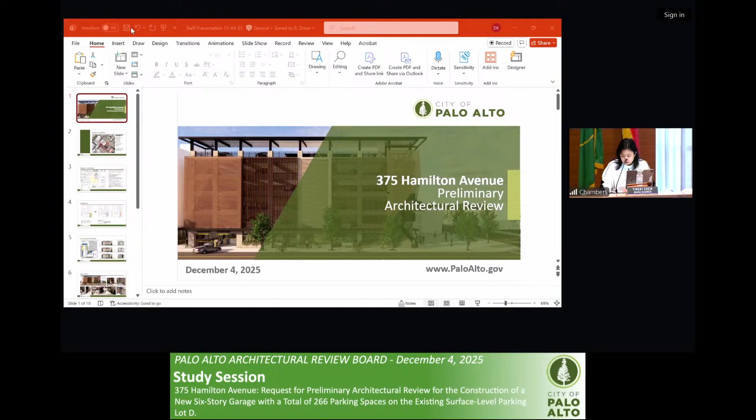With that, I will move to item number 2 today: 375 Hamilton Avenue, a request for preliminary architectural review for the construction of a new 6-story parking garage with a total of 266 parking spaces on the existing surface level parking lot D. Staff recommends that the ARB review and provide informal comments; no formal action is requested.

With that, I will hand it over to Christina for staff presentation. Thank you, and good morning everybody. I'm here today. My name is Christina Dobkevičius. I'm the associate planner with the city, presenting the city's project at 375 Hamilton Avenue, which is a parking garage project.

The project site is zoned as a public facility, and the allowable uses within the zone district include public facilities and uses owned and leased by the City of Palo Alto. Both the parking garage and the future affordable housing on the site are permitted uses.

The subject application is a request for a preliminary architectural review for a proposed 6-story parking garage that has 266 parking spaces and is currently in use as a public surface parking lot, Lot D. The downtown parking garage project was first introduced in the City Council's 2014 infrastructure plan as part of the city's broader effort to improve downtown parking availability.

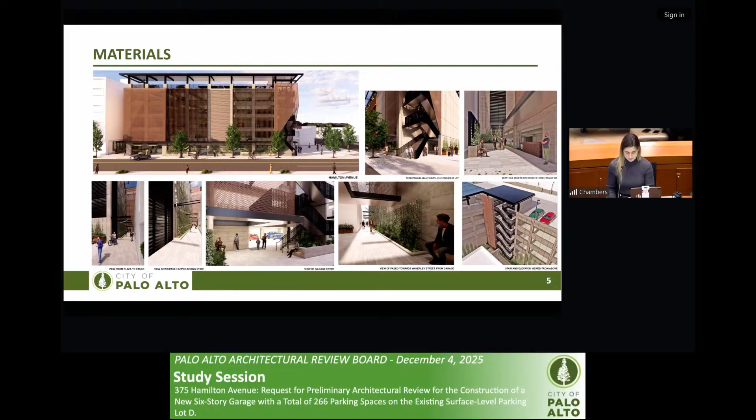Until the future housing is developed, the inclusion of a temporary public plaza east of the garage further contributes to the downtown's public spaces, which aligns with the city's vision for an accessible, vibrant, and well-designed urban environment. The proposal includes painted pavement, street furniture, and landscaping.

Today, we are asking the Architecture Review Board to provide objective and site-specific comments on the preliminary design, and your comments should be based on the bullet points here on the screen. We would appreciate comments about the massing, scale, site planning, pedestrian orientation, material selection, as such.

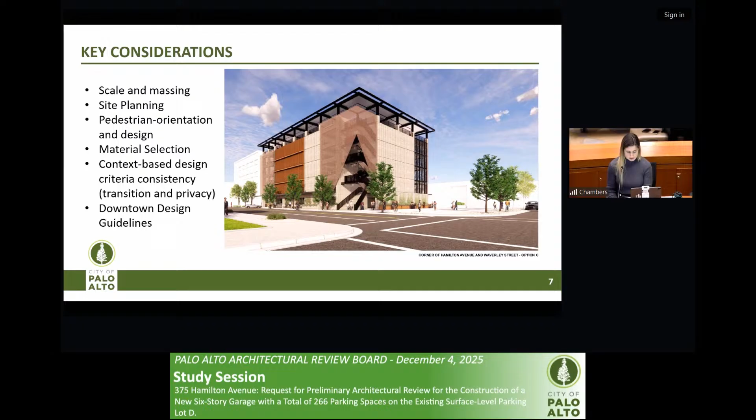At this early stage, the project has only been reviewed for general compliance with the zoning regulations, and a more comprehensive analysis will be done at the formal submittal.

Today, it's recommended that the Architecture Review Board review and provide informal comments. No formal action is required.

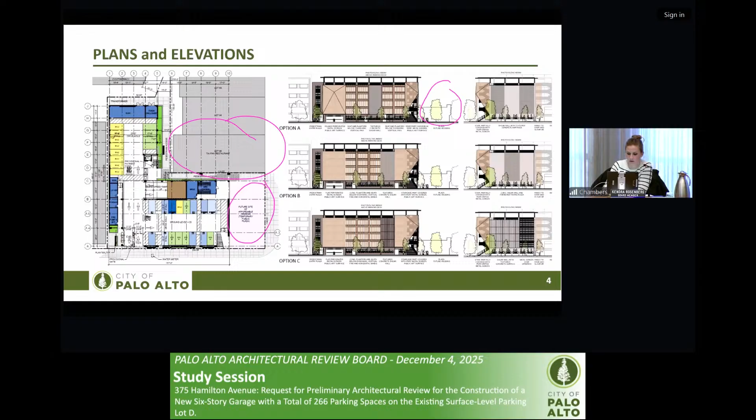Board Member Georges? Yeah, do we have any information about how likely it is and when this affordable housing might be constructed?

So we don't have any information to date. It's just that when we went to council in April, council voted for the option to reserve the space for affordable housing. I imagine it will move forward similarly to the way the Lot T project is currently moving forward. I don't know if you want to answer any more, Kyle.

Good morning, Kyle Ariano, Chief Assistant City Attorney. So the direct answer to your question is we do not know. The council's direction was simply to choose a garage option that would allow for it in the future.

So what we are seeing this morning are some aesthetic treatments to that portion of the garage fronting on the section next to, right at the corner of Waverly and Hamilton, leaving open that space for the potential construction of affordable housing. We don't have any plans or a timeframe for that project at this point.

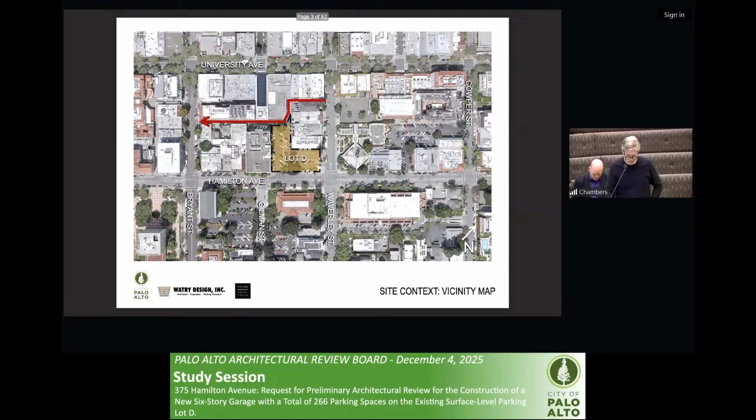As we know, the site is a 2/3 acre corner parcel at Waverly and Hamilton, currently used for city parking. The property is zoned PF, public facility, and the surrounding properties are CDC, ground floor restricted, pedestrian overlay. There are also some PF properties across the street and next door. There's a one-way alley from Waverley Street to Bryant Street at the back of the property.

There are some neighboring historic resources, which include, across Hamilton, the post office, which is a Category 1. Going down Waverley Street, two doors down, we have the former Palo Alto Toy and Sports Store, Category 2. Next to that is the Queen Anne Decker House, Category 2. And next to that, on the corner of University, is the Decker Oaks Building, a Category 3.

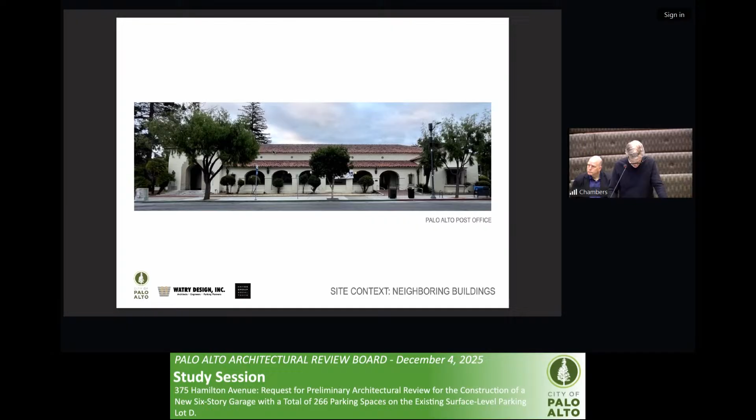Contextual views: here's the post office with the terracotta tile roof, rhythm of the arcade, and black wrought iron detailing. Down Waverly, we have the former Taipan and Prolific Oven next door, and then next to that, the historic Palo Alto Toy and Sport building. On Hamilton, the parking lot is in the middle, the AT&T building, about 60 plus feet tall, is on the left, and across the street on the right is the Caston Place and All Saints Church.

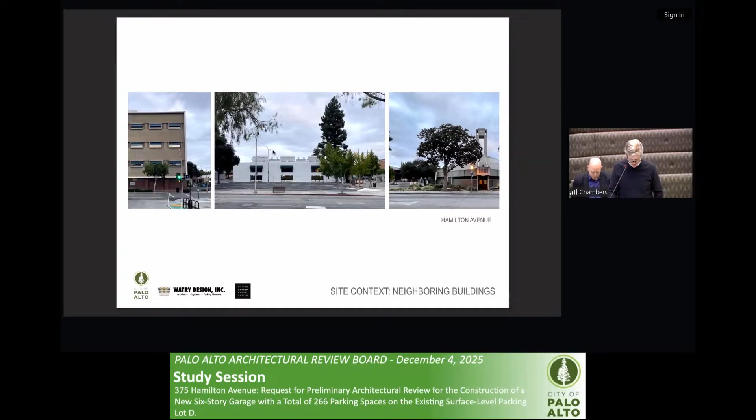In 2019, as staff said, council approved a 5-story garage with a basement. The design included board-form concrete structure, terracotta colored metal fins, and perforated metal screens that defined entries and so on. The program for the new garage is a 6-level garage, nothing underground, for 266 cars, replacing the 86 on site. There's a 4,500 square foot open space on the corner for future low-income housing. There's bike parking off what we're calling the Paseo, and a trash enclosure at the rear of the property. We also need a plan for rooftop future solar photovoltaic array, and we'll be collaborating with the artist Amy Landisberg for incorporation of public art.

Site constraints: we basically have a 0 setback on the west, which is the left, west side. 16 feet on the east side, 10 feet of which is clear for pedestrian and bicycle access and circulation. We then have a 10-foot Paseo next to Taipan, and at the front of the building there's a special setback that's going to be eliminated. We'll end up with a 2-foot setback and approximately a 12-foot sidewalk.

The parking dimension is 60 feet when you add those up on both legs of the building, so that's a constraint. We have 20% of the total wall area that needs to be open for 40% of the perimeter. So the blue line along the Paseo and the west or east side of the project, as well as the frontage on Hamilton, needs to essentially be 20% or 40% open.

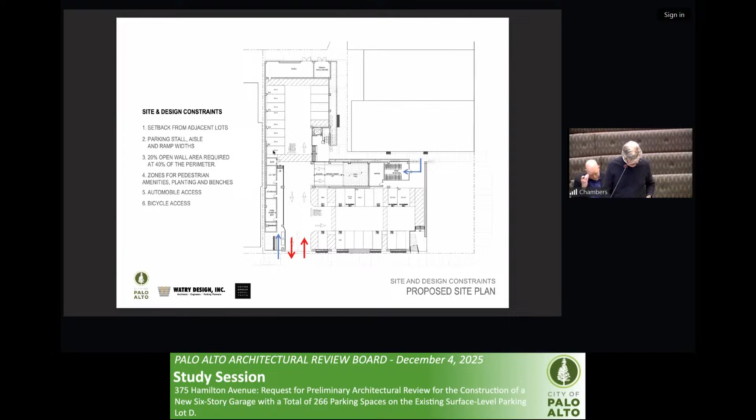Pedestrian zones on the ground floor here would include amenities like planters, benches, and C3 storm treatment. We have auto access off of Hamilton, which is the only access to the garage for vehicles. Bicycle access is off of Hamilton as well as the Paseo, which gets you into the bike storage room. We have pedestrian circulation at the east end, next to the open space, and off the Paseo, which leads you to the main elevator, where the main vertical circulation areas are the two red areas. And then again, we have the open space, which we're calling temporary open space.

Imagery and materials: we're thinking of richly detailed facades with textured concrete, metal stairs and railings, maybe picking up on the post office, deep recesses for shade and shadow, perforated metal mesh and fins to hide the cars, create dimension and permit ventilation in the garage.

Outdoor spaces, pedestrian nodes and circulation will be defined in the way that you see these stairs happening here, where they become exposed. We want to have defined circulation that is easy to identify and adds to wayfinding, et cetera.

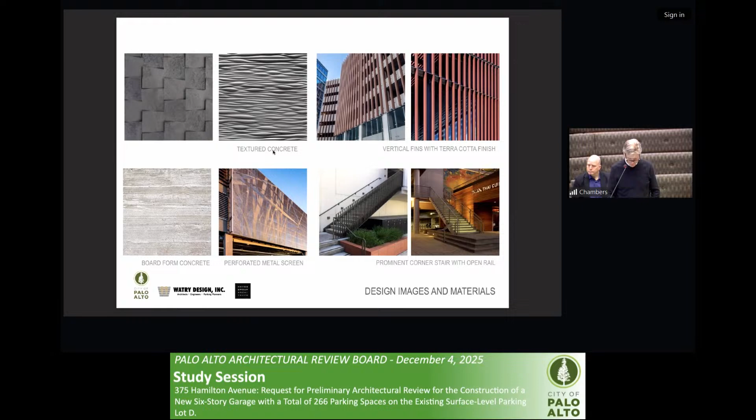The west end is the auto entry. We have an entry and feature stair at the other end of the building, and we'll be using perforated metal in these locations to define entries. The building is terminated at the top with the solar array and a rhythm of steel beams and columns.

The body of the building now has three alternatives in the application of the metal fins, the perforation, and the rhythm. We're calling them 1, 2, and 3 instead of A, B, and C. All right, so let's go through 1, 2, 3.

Option 1 would be a symmetrical composition around a required shear wall on this side of the building. We have the perforated metal defining the garage on the left, similar in all concepts, maybe with a three-dimensional quality to it. Perforated metal on the right changes between these options, defining that stair and peeling back to reveal views of the post office, with the shear wall in the center. I'm calling this the symmetrical option 1, with fins on either side of the shear wall.

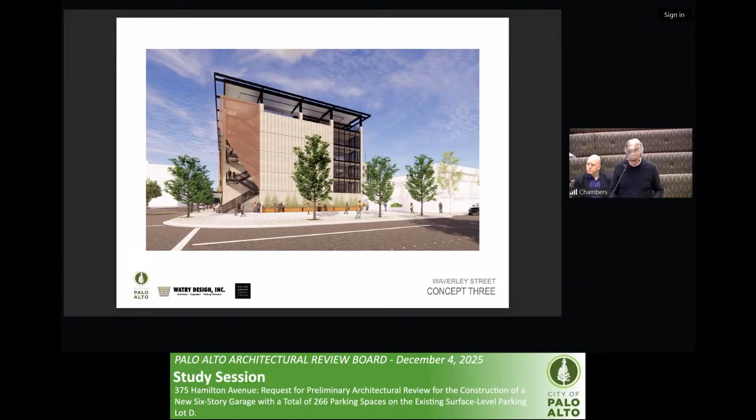Option 2 would be a single panel in the center with really no definition of base, but that panel would be the textured concrete, and the whiter panel would be the board form concrete. In the third option, we would create textured concrete, probably board form, with maybe vines that can grow up the building. On the right-hand side, the bigger move is to get rid of the concrete there and provide some relief with openings for light and air in the garage, drawing attention off to that side of the building.

A view from the post office corner. Now, these are interchangeable — what we do on the left on the main Hamilton facade could be paired with any of the options, in my opinion, on the Waverley side. So here was option 1, option 2, and option 3.

As we look further into the building, this is from the end of the Paseo on the left-hand side, looking down the Paseo. The garage is on the left, where we have some festoon lights hung from cantilevered steel elements off the garage, leading to one of the main entries and stair elevator circulation elements. Taking a step further down the Paseo, the bike parking would be on the left, again headed towards the main entry.

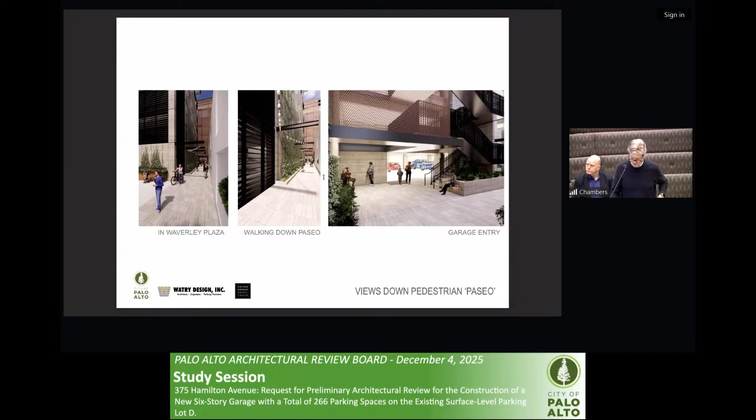And then you finally, on the right, arrive at the main entry. It's a covered area, defined by the perforated metal. There'll be benches there, and a two-story space when you come in.

From that lobby, looking back towards Waverley, the garage is on the right, which is the left-hand view, and on the right-hand side this view is a bird's eye of what that stair would look like, with the perforated metal defining the lobby. The elevator and stair are all incorporated into that element.

On the far west side at Hamilton, on the ground floor, we have a pedestrian node there with benches and planters and an entry. The metal canopy that runs down defining the pedestrian zone along Hamilton would turn and enter into the garage here.

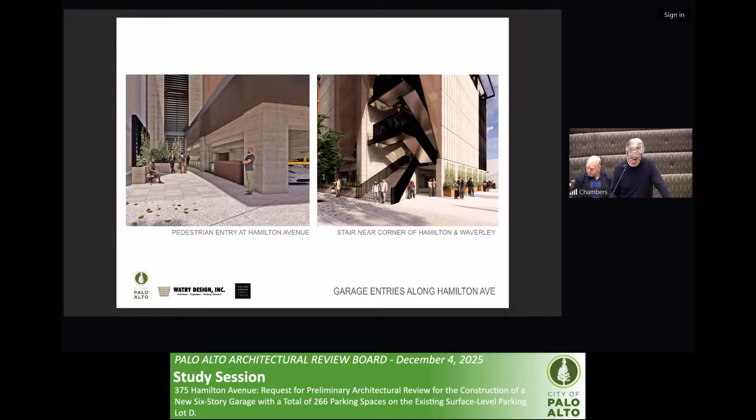And then you can see where the car is coming out - that is the automobile entrance. And then on the right is the stair as it cascades down from the upper floors, spilling out onto the sidewalk. I like the idea of that being ripped open like that, so that as you come up and down the stair, you get views of the post office, and it just seems more fun. And then a view stepping back.

So the open space - we're calling this the temporary open space. We have to think of it like a pop-up space almost. We don't know what the time horizon is, but that's the concept.

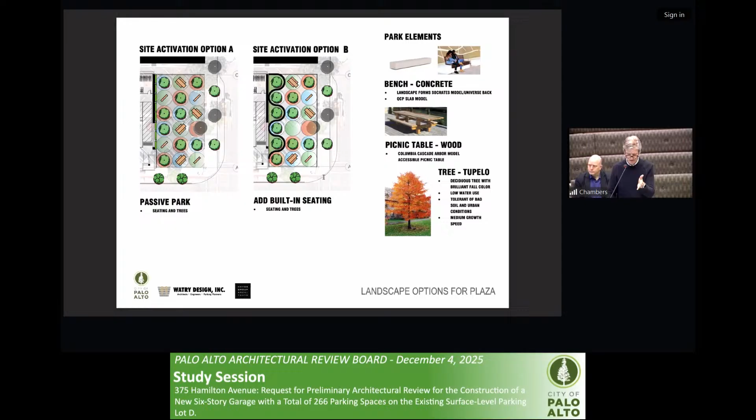And then we would activate it with two different options. Option on the left is benches and tables, and some additional trees. Option B on the right would be the same tables and benches, but perhaps some more formal planters in the sinuous shape that runs down the left-hand side. Thank you, happy to answer questions.

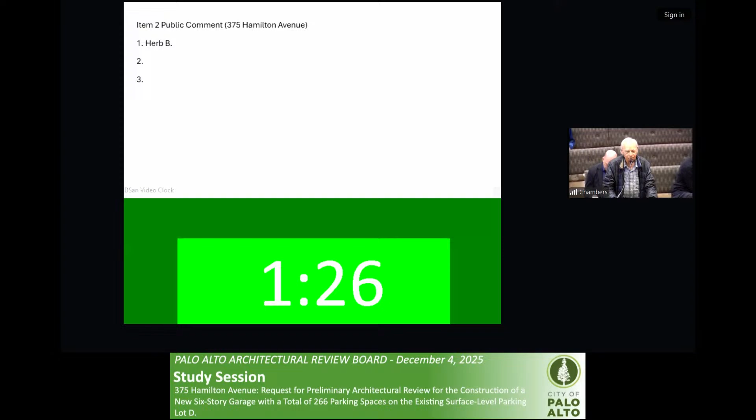So when this comes before official environmental review, it could be challenged for violating that environmental regulation. Both of the applications have items that are unique to them. While decisions are being made on whether and when to build a parking structure at this location, there had been a publicly available restroom at the parking lot level that was removed. At that time, I also added to the administrative record that removal and its possible replacement are also part of this project.

Many pedestrians, rich and poor, housed and unhoused, travel that route, and it shouldn't be required that if they need a bathroom, they have to go to City Hall or buy something at a retail establishment. So therefore, the ground level should have one or two public bathrooms that are accessible by anybody.

If they're required to be paid to use them, then as in the past, the food closet or the opportunity center could provide free tokens to people who are poor and need to use the restroom. But removing that restroom also violated environmental and city regulations on projects, because it should have been included in the environmental review here. In regard to the other parking lot, Lytton Kipling, I'll be proposing something there that could be accepted whether the existing project is built as planned and approved, or whether the design professionals in this body suggest and approve a different project, or whether it remains as a parking lot.

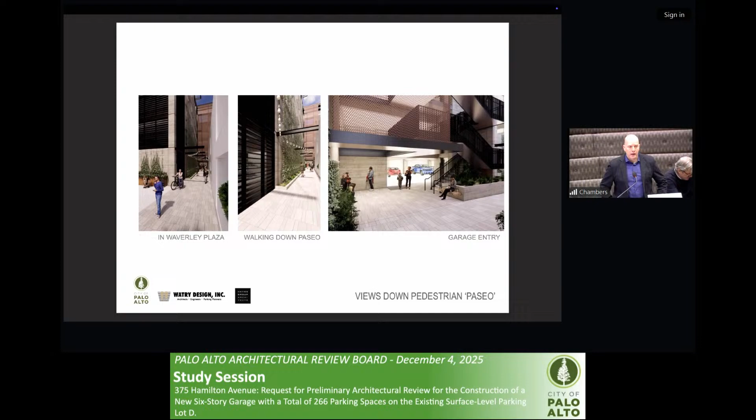Okay, thank you. Awesome.

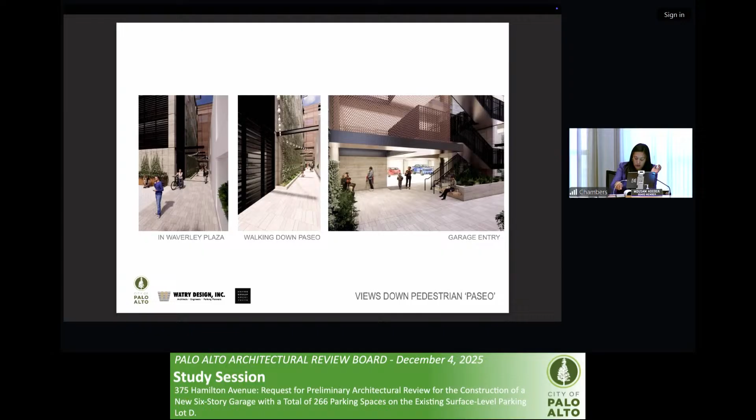I want to go back to the Paseo - the north-south, sorry, the other side that connects to the lane, with everybody's trash right now, it's not the prettiest place to look at. Without this trash room accommodating the other two lots, it will kind of remain that way, so the straight shot into the elevator stair area of the garage will be a little bit nicer. On the side perpendicular to Hamilton, you've got nice new planting, looks like a bench, but then you're looking at trash on the other side. Is there any possibility for the squiggle area to accommodate that so it's not a sea of dumpsters?

We do know that 526, which is just here, was just redone - the whole back of that building has been redone, they've got their new trash and recycling facilities there. There are facilities here, but they don't appear to be used from what I can tell. These will be relocated to here, and it's really a city decision on how these are handled. Right now, this trash room is not large enough to handle all of this, and it's not the city's responsibility to accommodate adjacent properties if they already have it, but maybe it's more of an enforcement issue that they actually use their trash rooms. We've had a couple meetings with our zero waste team in the last couple of weeks, and they're going to go talk to that property owner because they do have enclosures that would accommodate their receptacles, and it just doesn't seem to be them using them at the moment.

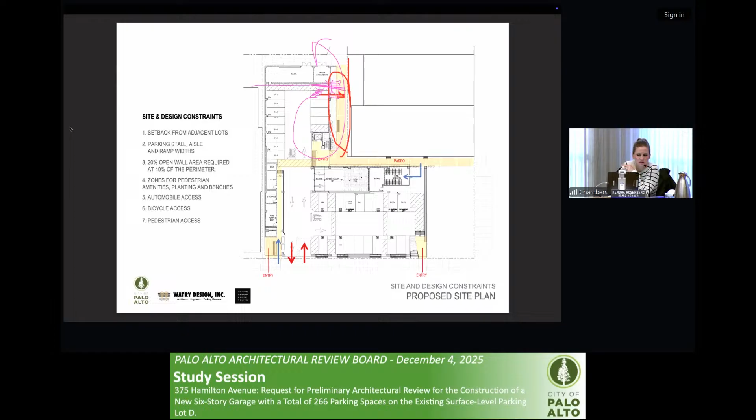Currently, you're correct - you would have to walk back down the drive aisle, out past the elevators and back up, so you're walking around and back on yourself. It's not that far. The reason we didn't add the access in there is the planter you're seeing is providing the C3 stormwater planting, and by splitting it, we then have to change how that drainage system connects and runs through.

Having a continuous run means the system can operate as one facility rather than splitting it into two. And there's also an area we're trying to meet. Obviously, there's a very minimal floor plate with the garage taking up most of the area with the parking requirements and dimensions, so we're kind of getting that C3 facility in.

So we can certainly look at the option of coming through. The access we have for the electrical room there could form an exit. So we could look at the balance of what C3 facility we need, and if we can get the right area, we can certainly look at adding a pedestrian route in there.

I think you answered my question, and part two of that was going to be, why wouldn't the trash go that direction towards the two restaurants? But no, this makes perfect sense. I think that's well thought through, so no complaints.

Thank you. That was the direction the trash enclosure looked at previously in the other scheme, and while that still would work, the C3 is another item. Also, the movement of the trash collection vehicles and pulling them out, it's actually easier for those to be moved out to the north and coming round the corner.

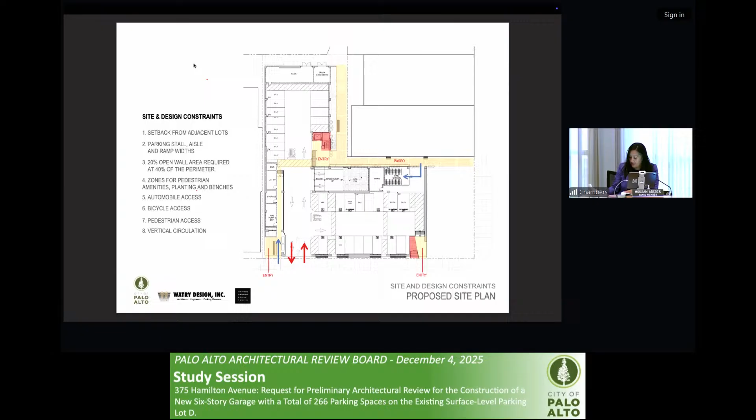All right, then I'll jump in and ask about the facades. It's rare that we actually get options to review, but I'd like to hear from you, Ken, what would your preference be? Two. And elaborate on why, please. How come I can't get my— oh, there we go. Yeah.

I kind of like the rhythm in option one, but I think it makes the shear wall an issue—we need a shear wall that's at least 20 feet on that edge, and there are some pretty severe restrictions about where it can go according to the structural team. So we're limited; it can't go any closer than that to the stair on the right. It works in the middle, and we didn't see it moving any further to the left.

I like the idea of option two because it simplifies the composition. It kind of takes all the fins and puts them in one place, so that's a singular statement of the terracotta. The fins are supposed to pick up on the terracotta of the tile roof, and then there's some brick.

There's lots of brick, in fact, as you move to the left down Hamilton. And I like the larger, more equal kind of termination of this screen—it's somewhat similar to this screen here. One thing not shown in this elevation that was shown here is that you see these creases.

We didn't really develop that idea yet, but thought that, maybe with the artists, those metal perforated panels could start to feel like they have a volume behind them, just a little more interesting. As you drive down the street, you'd be able to see that, perhaps sticking out some, to get your attention to where you're supposed to pull in.

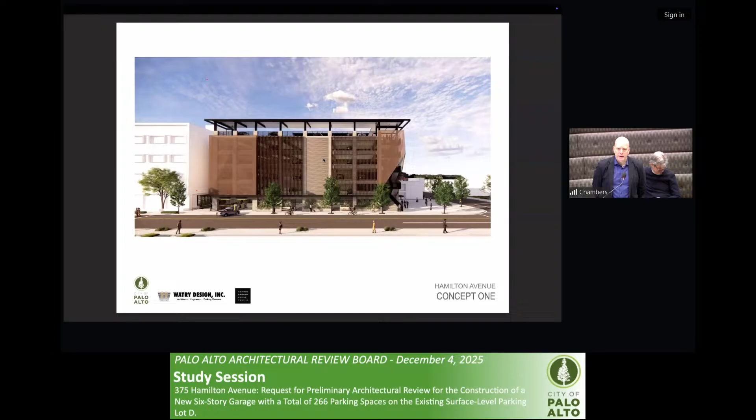Would it be precast, cast in place, or shotcrete? These at the moment would be cast in place. The garage is a long span structure, typical for parking structures, post-tensioned, which is generally a cast in place approach, particularly with the shear walls. They could be precast, but precast comes with a raft of other requirements with T's and beams and such, which would impact the openness. As Ken said, we're quite tight on the openness for the garage, with the east and west elevations being defined as closed, and that's very helpful.

I've only used this kind, which is hard enough to do. So while these are very intriguing and would make the building look really beautiful, I'd urge you to test it out. That's conceptual - we'd like to use a pattern, and I think the next step, if we're on board, is to dig a little deeper, either get photographs of installed work or get a sample. I'm not always supportive of the board-formed liners; I'd rather do board form because it looks a lot better. So I don't know how these come out, but...

So on the elevations, for the metal vertical fins, is it only applied along Hamilton Avenue, and for all the other sides it will be the black louver thing? That's correct - the only place we're using the fins is on the Hamilton facade. On the Waverley facade, that's going to go away eventually, and it would be too much expense to remove it for day two. On the Paseo, we have more of an open look with wires, and the intent is to get vegetation to grow up there, so we do not have fins along there.

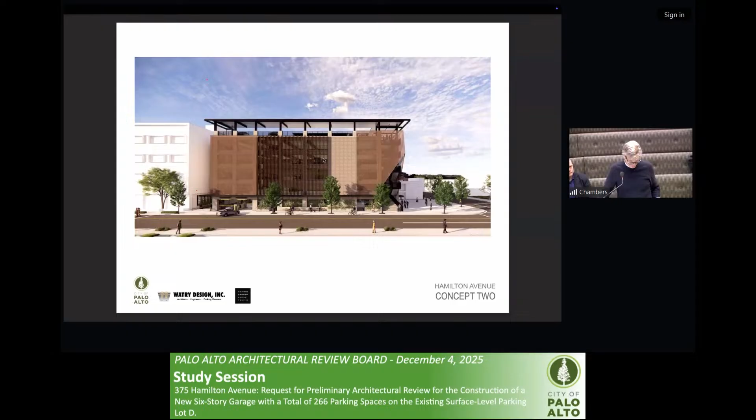Any other questions for the materials? Kind of a more general question about the facade. I really like the design from 2018.

What I'm struggling with a little bit is we don't really have a timeline for this temporary housing and the plaza, so I think it's important to make the Waverley facade aesthetically pleasant, because it might be there for a long time - we don't know how long, might be forever. And along those lines, Waverley Street - the restaurant is only 2 stories, and basically that entire street is low rise. In the 2018 version you only had 5 stories, and now you have 6. So for me, your building increased and the design kind of decreased - it's kind of a double whammy.

And then, similarly, I think the design of the plaza, I think it's not very pleasant. The way you described it, they're gonna put new asphalt and paint it, and somebody's gonna put new benches, and you have some photos of the benches here in a document. It really feels temporary.

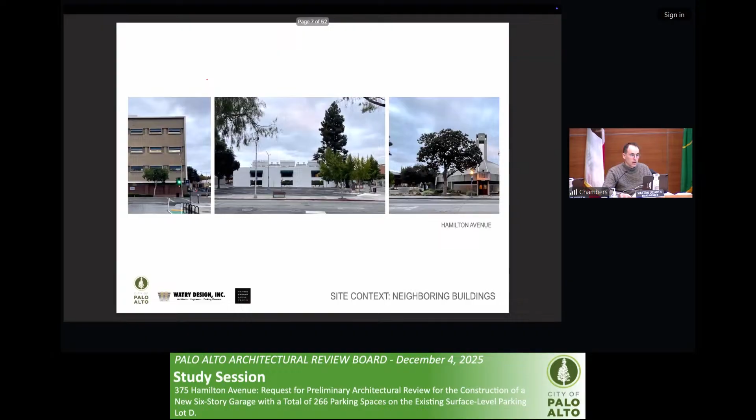What at the bottom right, what I really like here is those four vertical white kind of columns. I really like the open feel of the garage. I also like the first floor with the stores - of course, that's not a possibility. You're probably trying to work here with shear walls in the new design, but you were able to do this one without shear walls.

So maybe a more open design could work. Maybe some more thoughtful landscaping with trees, not only in planters, but planted into the ground. And then I think also, maybe it's just the perspective here, but even the top floor in your rendering kind of looks more light and airy, as opposed to what you're proposing now. Now that I see it, might just be a rendering. I think it's just the rendering.

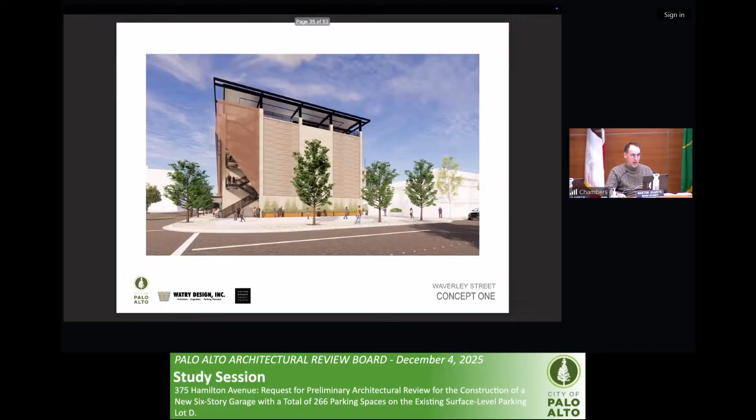So yeah, I think a more open design would be better on Waverley, with landscaping that looks less temporary. Like I'm looking again here - there are those concrete boxes along the wall, the concrete planters, painted orange. It looks very temporary. I'm looking at this plaza as a public space. I think Palo Alto has really nice public spaces - this would not be one of them. So can we make it kind of more like Palo Alto?

Okay, so that would be- Yeah, Gordon would like just one second. Yeah, sorry, just to give you some input on the shear walls and the structure. With us adapting the floor plate from the previous design, we limit the amount of shear wall that we now have available that doesn't block the drive aisles. We also have this shear wall at the end in anticipation - as you say, we don't have a planned date for the residential area, but we need that shear element, and this is a way of actually creating that fire separation we spoke about earlier.

I understand what you're saying about the openness. I think the example here on the screen is where Ken and our team have been trying to get some of that openness back, keeping the bays that don't need to be shear walls more open, to try to express that kind of more open end we had previously. So this option 1 of Waverley is trying to get that part way there. I completely understand what you're saying. We've also had a change in code for structural elements, which means that depending on the width, they now need to be deeper, depending on the height as well. So we've had a few more restrictions with floor plan and structural regulation that has driven where we are.

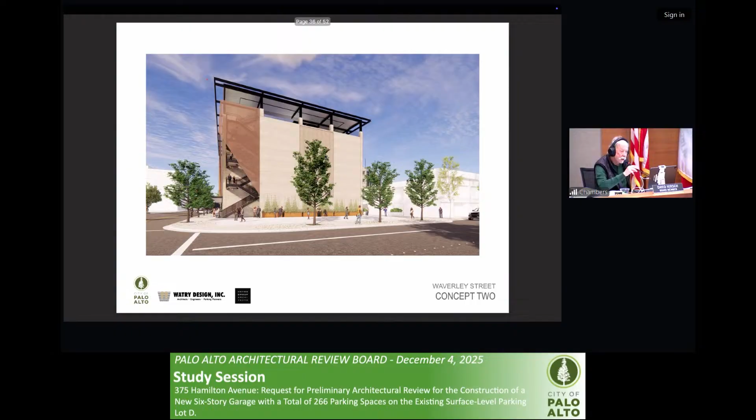But the massing here, I thought about it, and it certainly is better, actually, when it's a shorter building the way it is, with the possibility of something happening at that corner. And I really like the way in which the screen opens up at the end. So that would limit the housing, so I hope maybe the housing goes away.

Because to look at this and make any decision about it requires us seeing what the hell that corner is going to be with housing at it. It doesn't seem to lend itself as a size of a housing site to be appropriate for the housing in the first place, because sort of two of the walls are not even usable for light and air.

So I hope maybe the council finds another place. They're already working on another place, so maybe that would be enough for the beginning of affordable housing in the city. In terms of the corner, it seems to me that there are other ways to deal with that wall. We've had a really good example of that with—

What's the model of the car project that we... on Tesla? Anyhow, the vegetated wall. You don't know it? Have you been down to the— I believe you're referring to the Mercedes-Benz. Mercedes-Benz, thank you. Have you been to the Mercedes-Benz?

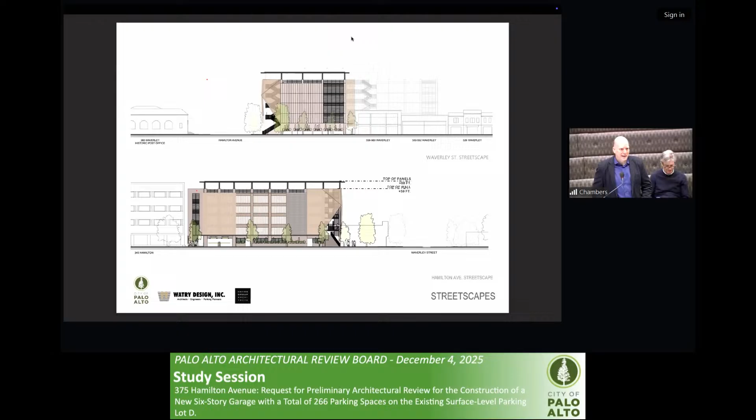Been there, done that. Yes, I'm sure. Thank you. Not good. I'm okay with that explanation, of course. It would come out eventually anyhow, so.

But I do think that if we could, as a board, agree that looking at the whole facade of the Hamilton side there, and the size and mass of the building next door, let's go all the way to recommend to the council not to use that corner as part of the garage, but rather to keep it as an open landscape. The council is trying to use it as housing, is the objective. But it's kind of a ridiculous place for a small amount of housing you're going to get on a particular site like that, so I think it's not a reasonable thought to have. I know we're not supposed to make a recommendation, but I feel rather strongly that the garage should stop at that point where it is.

Do you agree, board?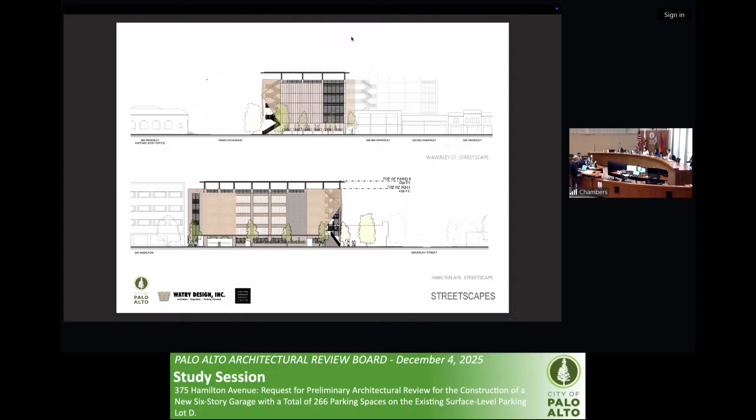What I'm hearing from some of the members is that the park, whether it's going to persist or whether it's going to go away, needs to be more thoughtfully designed as something that could stay there for a very long time. And also the side of the garage that faces that parklet should be considered more in terms of long-term versus how the housing will fit on it now.

So I think a very good question is whether it's cost related. Given that we don't know when and if this housing will get built, I guess for the city the question is, is there a preference from the owner side to be as minimally expensive, hoping for near term, 3 to 5 years for the housing, or are we looking at this maybe for 5, 10, 15 years? So I think we're trying to strike a balance because we don't know the timeline for the affordable housing project.

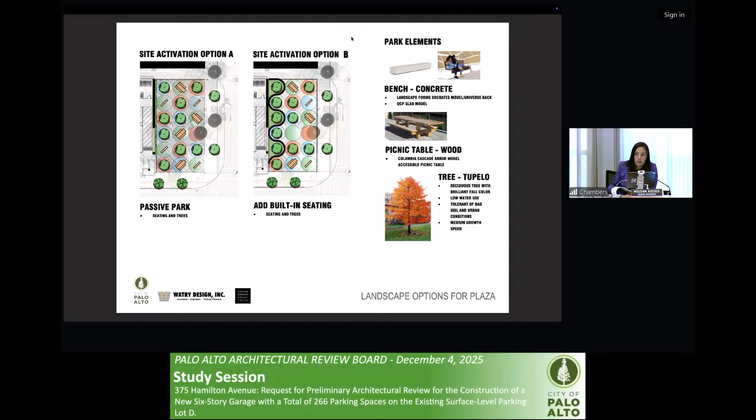So right now, we just want feedback on what you think would be a good idea for that space, because the same applies to the elevations David was talking about, since option 3 is the most open on the elevations, but if in 5 years all of that expensive metal has to come out and be filled with concrete wall, it doesn't make sense. But if it's there for 15, 20 years, it does make more sense to have a slightly open, more feeling elevation on that side.

Correct. It's a little difficult for us to comment without that. Agreed.

As a city staff person, I would say the least amount of day 2 work that we have to do would be better, for work-wise and capital cost-wise, because then we're going to have to program funding and another project later down the line to make this ready for an affordable housing project. However, we know it's a balance of the timing of the future project.

So question for the applicant - I know the initial thought on the paving is to patch the existing asphalt and do something with that surface. It's a day 1 versus day 2 cost, but did you guys consider actually removing more of the asphalt and having more planting, so you don't have to demo as much hardscape later? Was that a consideration? Well, there's also a way to reuse the trees, depending on how you plant them or whether they're in raised planters. We were just being very cost conscious with the landscape architect, trying to avoid costs that we know we'll be throwing away once it comes out, but we don't know for certain that time frame.

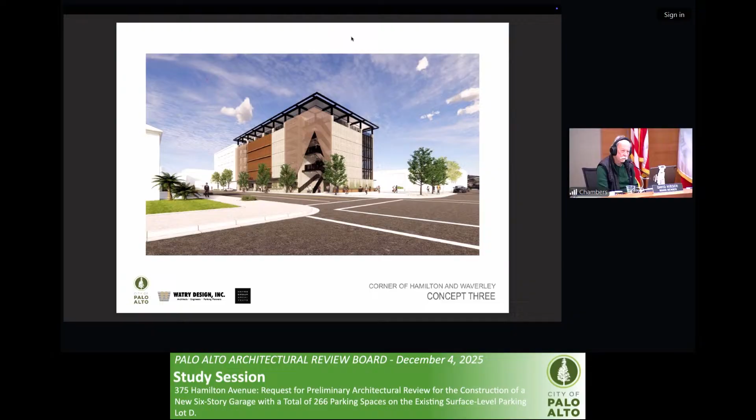Yeah, we're trying to maintain a 12-foot sidewalk. I guess you can look there. There's not a lot of distance here. I think the paseo is important, and 10 feet allows us to have the openings on this side. Then you basically have the structure, requirements for the ramp, the structure, the 60 feet, the structure, and boom, we've got 2 feet to the property line.

I'm wondering, Ken, to interrupt you just a minute - does the paseo have to be 10 feet? You're putting a little planting down an area. Openings would be 10 feet, right? Yes, 10 feet is required to allow us to have an open facade. If we reduce it below 10 feet, we wouldn't be able to count that facade as open, and we wouldn't be able to meet our openness requirements with the 20% and 40% perimeter. We're kind of restricted because of the solid wall to the AT&T building, which takes a lot of the building perimeter away. So that 10-foot is really a requirement to have openings that aren't then fire protected or limited in size.

You have a fire separation between the two buildings. If you had more of an open space, because AT&T moves in and out a little bit there - the back of the building, I believe, is set back, not on the property line quite as it is in the middle. We need to be 10 feet from our property line, and unfortunately their building doesn't step outside of that. I understand. It does, as you say, weave further away, but it moves away inside their site rather than at our site. Has to be 10 feet from our property line, yes.

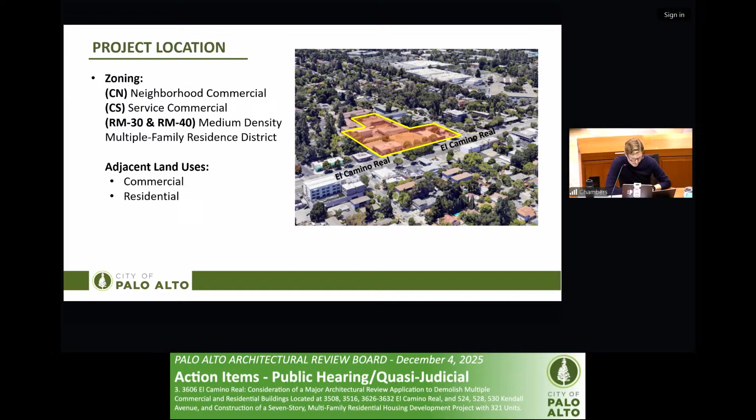As for background, on February 15th of 2024, a Senate Bill SB 330 pre-application was submitted to the city. Following that, on June 10th, 2025, a major architectural review application as well as a vesting tentative map, not for condominium purposes, just for a lot merger, was submitted. Then in September 22nd of this year, the applicant requested consideration under new legislation, Assembly Bill 130, detailed on the Public Resources Code section, for a more streamlined approach to CEQA analysis and environmental review. We're here at the December 4th meeting, and tentatively going to council in early 2026 for a decision or recommendation on the project.

Some high overview of the project.

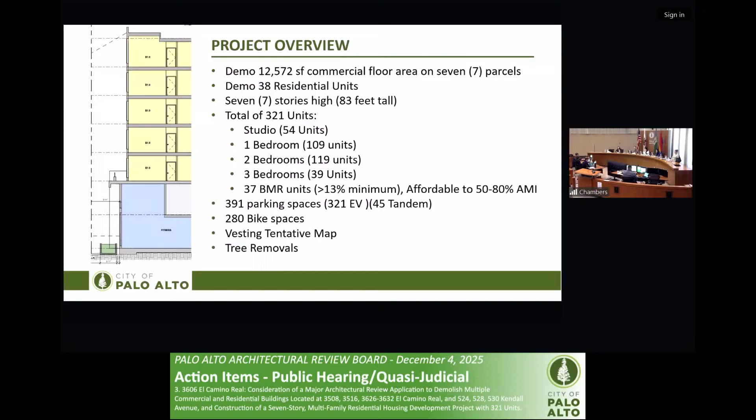It would be to demolish approximately 13,000 square feet of commercial floor area across 7 parcels. There is a vacant parcel centered in the project site, and there are 38 residential units currently there. Those would be removed to make way for the 321 units.

As detailed on those project plans, those range in size: 54 units for a studio or junior bedroom, 109 units for a 1-bedroom, 119 units for 2 bedrooms, and 39 units for a 3-bedroom. Of those 321 units, 37 would be required under that new legislation, meeting the 13% minimum BMR affordable at 50 to 80% of the area median income.

This project is located in the El Camino Real focus area, which affords reduced parking requirements of 1 parking space per unit. Currently proposed is 321 EV parking spaces for each unit, 45 of which will be tandem, and a total of 391 parking spaces would be provided, in excess of that zoning requirement.

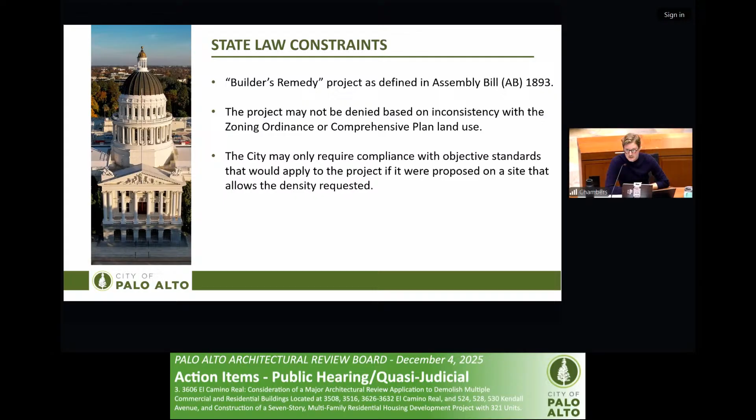Further, the project is proposing a 3.49 to 1 overall FAR and 121, or 128 should I say, dwelling units per acre density for that project site, and that would be permitted within the El Camino Real focus area. Under the state density bonus law, the applicant can request waivers from applicable standards that would physically prevent the project from being built at that permitted density. That could be anything from a request to go above the height limit, floor area, open space, or other standards.

Since the applicant did request in September to invoke AB 130, that further exempts infill housing projects from CEQA, and sets strict timelines for the city's review and decision. I'll walk through that a little further in the presentation.

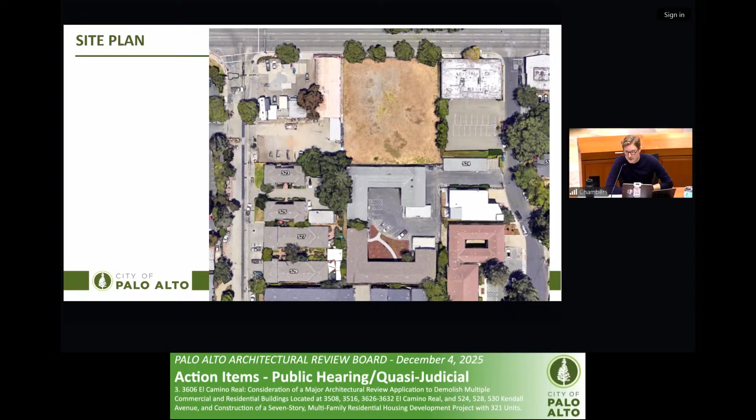And the proposed site plan. Moving on to floor 1 of the building, with the legend on the left-hand side showing leasing and amenity areas, fronting El Camino Real with the at-grade parking garage towards the rear. 2 entrances would be located on either side of the project, one at Matadero and one at Kendall.

As we move up through the building to floor 2, the garage continues. We have a 2-story space for amenities open to below. Onto floor 3, where we get into some of the units and the podium open space, as well as a pool.

Floor 4, floor 5, floor 6, and floor 7, with an amenity space at the top left-hand corner.

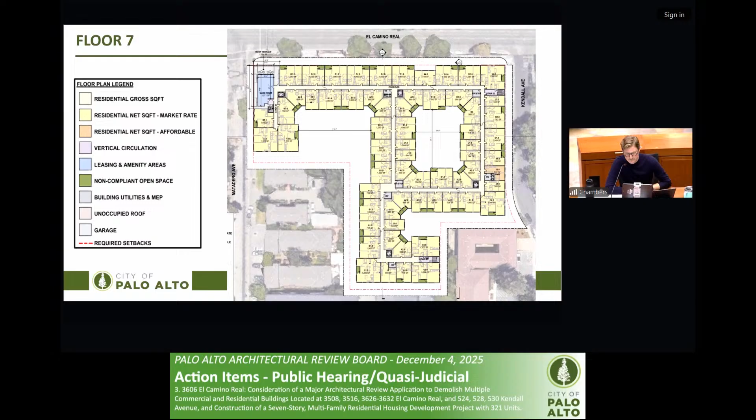And the roof plan. As noted before, the project is coming in under the height limit for the El Camino Real focus area, which is 85 feet. As proposed and indicated on the plans, it's at 84 feet.

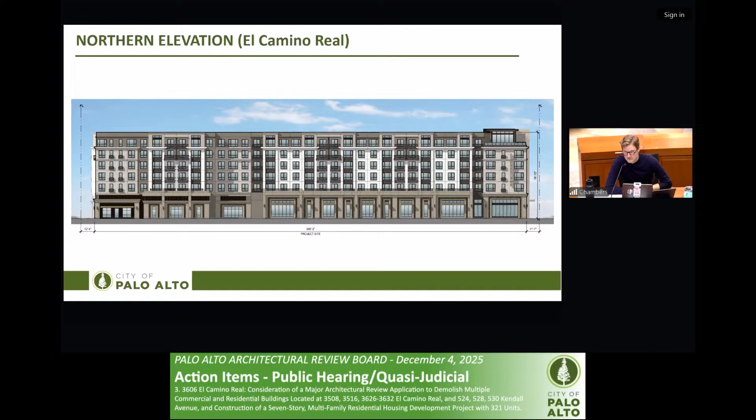For some elevations here, we have the frontage on El Camino Real, the northern elevation. The eastern elevation along Kendall Avenue, noting the existing 2-story residential buildings at the left-hand corner. The southern elevation, and the western elevation at Matadero Avenue with the other entrance to the garage and those existing 2-story residential buildings.

We have some renderings here. This is the corner of El Camino Real and Matadero.

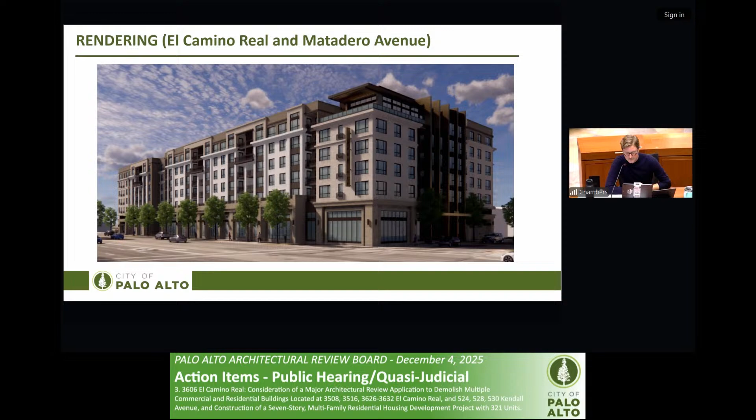And the other corner of the proposed project at El Camino Real and Kendall.

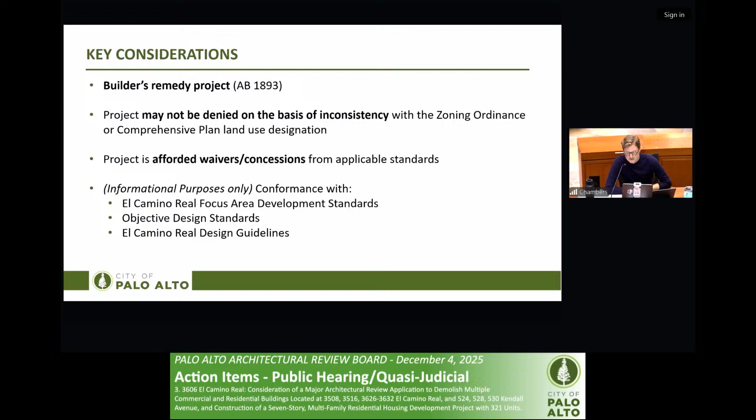So to frame the discussion this morning, this is a builder's remedy project. The project may not be denied on the basis of inconsistency with zoning ordinance or comprehensive land use designation. The project is afforded waivers and concessions from applicable standards should the applicant find that it would preclude the density on the site. As provided and detailed in the staff report, for informational purposes only, was a detailed analysis of conformance with applicable standards should the project be submitted regularly and not as a builder's remedy. That would be the El Camino Real Focus Area Development Standards, Objective Design Standards, and the El Camino Real Design Guidelines as well.

As for CEQA status, the city is still evaluating the project's eligibility for processing in accordance with the new Assembly Bill 130. That's new legislation that exempts infill housing projects meeting certain criteria from CEQA and sets fast timelines. The city did start the tribal consultation process, and we received requests from 2 tribes in the area, which is currently underway.

For the timeline of the project, once tribal consultation is complete, the city would have 30 days to make a decision on the project. So it's a very fast timeline for review.

For the recommendation here, provide some initial comments on the design and perhaps identify some areas so that the design could either be improved or items could be tweaked, but keeping in mind that the project cannot be denied based on inconsistencies with the zoning code.

And with that, I can entertain any questions and am happy to bring up the plan sets and walk through those in further detail. Thank you very much. Any questions to the staff?

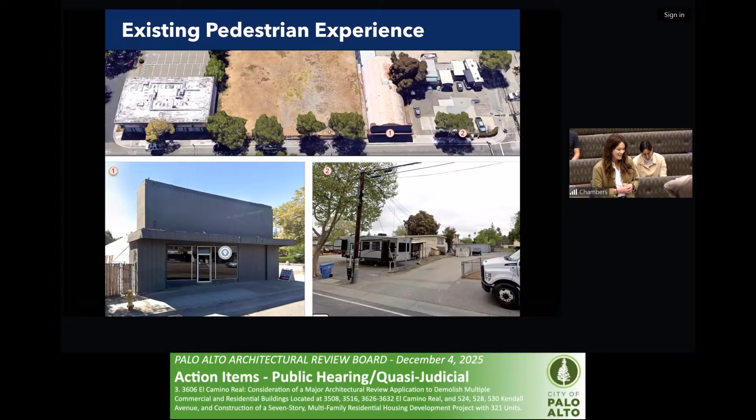The existing pedestrian experience leaves a lot to be desired. Currently, it's 1- and 2-story commercial buildings that are underutilized. We have vacant land, pretty limited landscaping. I think it's one of those sites that whenever any of us would walk down El Camino, you'd say that's a site that's really ripe for transformation. So with that, I'm going to hand it over to our architect, Nathan, to walk you through the proposed project.

Hi, everyone. My name is Nathan Simpson. I'm a principal at BDE Architecture and the designer for this project.

Diving into the project, some of these renderings you've seen already. The project is envisioned to be mostly a timeless design in a contemporary context. You'll see a lot of asymmetry, which is very common on a contemporary building, but keeping a more timeless aesthetic. We are using traditional symmetrical windows, and then you'll see throughout the design overall symmetries, including on the side of the building where the entrance is. We keep that very symmetrical, just kind of helping with wayfinding. That also has an architectural element with the vertical fins, creating a little bit more design aesthetic, a sizzle, shall we say.

Using a traditional design of base, middle, top, so you can see really strong trim lines on the project, and then a heavily articulated base using an upgraded material that will last, especially with the traffic on El Camino Real. Those are some of the major comments there.

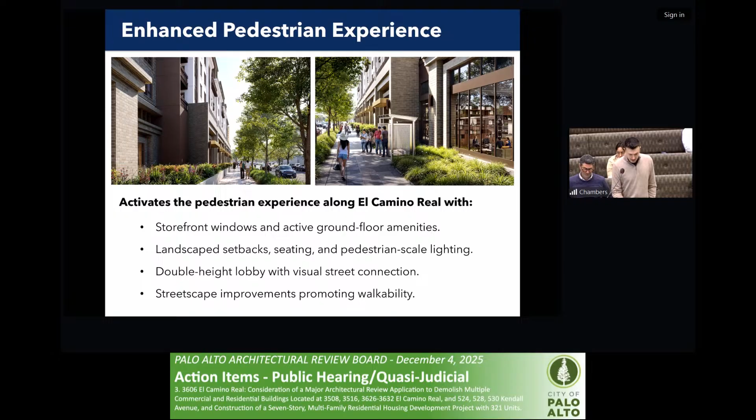We also have, I believe, a 4 or 6 foot wide planting strip that's been added along with more trees. All of this is to create a more pedestrian-friendly realm and also shield pedestrians from the traffic. You'll also notice we have a bus stop right up front, right at our front door, so the project is very aware of our transit orientation.

Because we do have the bike lane right along El Camino Real, we've opted to have on the opposite corner of our main lobby a bike shop and a bike lobby, so pedestrians on bike can get into the building very easily. We also have centralized elevators, so bicyclists really have a front door—they're not secondary to the building at all. We've also taken into consideration Uber drop-offs and Grubhub orders, all those sort of items.

I want to step back really quick to this rendering—I didn't mention it, it is a 7-story building, and we've taken great care to not only conceal the 2-story garage, but do double height spaces along the majority of El Camino Real, which creates a 6-story read at the corner here. We also step back with a roof deck here, so the building's using a lot of tricks to help scale it down, especially at a pedestrian level from eyesight. We also are including a mass break, which is consistent with some of the city's desires for better design. That fitness center you see right here in the middle is at that mass break.

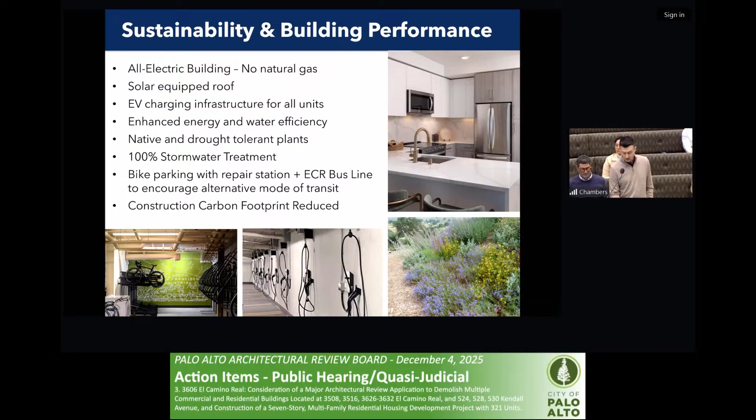Some sustainability on the project—since architecture includes everything these days—is we are all electric. The project will be solar equipped. We have EV charging infrastructure for all the units. The project will be equipped with all the Title 24 latest and greatest energy and water efficiencies. We also are using native and drought-tolerant plants. The project will have 100% stormwater treatment. The bike parking with repair station and ECR bus lines being right up against the building are going to encourage an alternative mode of transit away from cars.

Jumping down a little bit, the alignment with the focus area goals—we are working on really aligning with that, including this project being 100% housing. It's below the FAR limit. The building scale and density are in alignment. It does exceed parking ratios, so street parking won't be impacted as heavily. It does provide affordable housing and shields parking from the street. And I think those are the main things we had to get to in 10 minutes. Thank you, good on time.

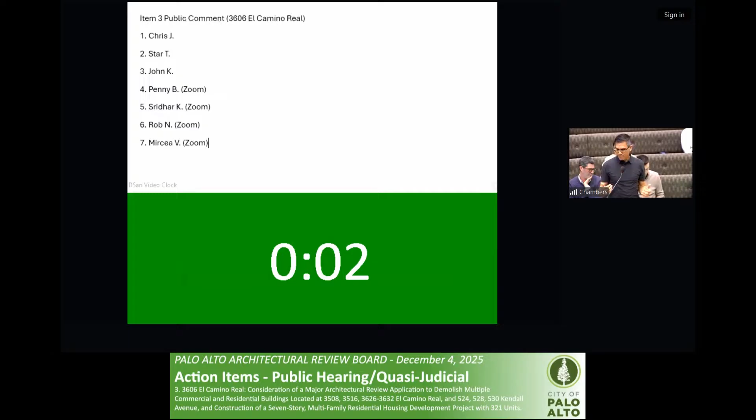Since you've cut the time, I want to say upfront that I recommend you require a transportation analysis and evaluate the areas which do not meet the El Camino focus area, which are many. Abandoning properties on El Camino for decades is not stewardship. A well-designed building in the right place with complementary landscaping is not just a beautiful structure, it's an asset in building the community we're all trying to create. This underscores the importance of your roles for our city and community.

The recently unveiled police services building is such an example, as is 3150 El Camino. It's beautiful. In contrast, 3606 may have some internal features that have value, but the negative impacts are not trivial. If the surrounding buildings were not owned by one of the developers, there would be much more opposition. The scale and mass are too large for this site, especially without underground parking. It has a blocky, uniform facade that stretches the entire length of El Camino, with no consideration for blending with surrounding structures, nor any public communication about traffic impacts. The trash management system alone is problematic - I can't imagine the sound of mechanical trash compaction so near the Kendall homes.

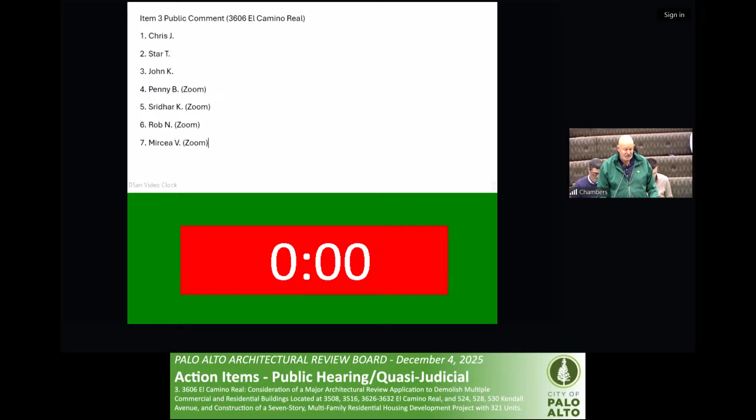My name is Penny Brennan. I live about halfway down East Matadero Avenue, across El Camino from the proposed building site in the Ventura neighborhood. I oppose the proposed project for several reasons. One, a high-density, 7-story building at this location would be at dramatic odds with the appearance and character of the Barron Park and Ventura neighborhoods it would be placed in and adjacent to. If it is designed similarly to most of the recently built developments along El Camino, it will have a modern concrete and glass urban design completely at variance with the almost rural, single-family residential character of the surrounding Barron Park neighborhood and with the post-World War II Palo Alto working-class character of the Ventura neighborhood across the street from it.

A 7-story building at this location is going to tower and loom over that part of the Barron Park and Ventura neighborhoods. For example, from my kitchen window, which faces El Camino, I now look out at my neighbor's trees and the sky above them. If the proposed project is constructed, this view will be replaced by a view of 6 stories of concrete siding and glass windows. I estimate that a building with 321 units will represent a population of at least 600 to 1,300 new individuals. Likely, residents of each unit will own 1 to 2 cars, translating to 300 to 600 vehicles that will require parking and egress to and from the building complex.

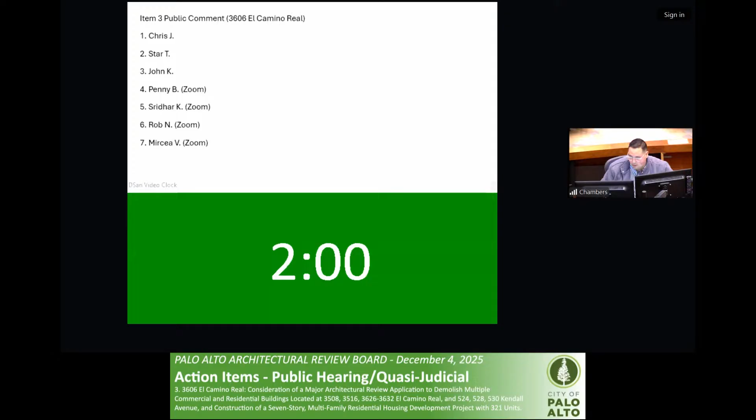Hi, my name is Rob Nielsen, and I'm a Palo Alto resident. I support this project. I'll give you 3 quick reasons. One is its consistency with the city's housing plans and housing goals, and its way to meet the state requirement for 6,000 new units.

All 4 of the parcels on El Camino were selected by the working group and the staff as very appropriate parcels for new housing. The city has since added the El Camino focus area, and the council added this site in particular to that area. So I think it's a very good place to meet the housing goal, which is very ambitious right now. One problem with El Camino is a lot of the sites there have very small parcels, hard to assemble something. Here we are able to get something a little bit larger.

Second is the location. There's a bus stop right outside on Matadero for the number 22 bus. It's one of the highest frequency buses in Santa Clara County, 4 per hour. You're a few blocks away from number 522, which has similar frequency. It's along the new protected bicycle route that Caltrans has provided, and it's not too far of a bicycle ride from Caltrain.

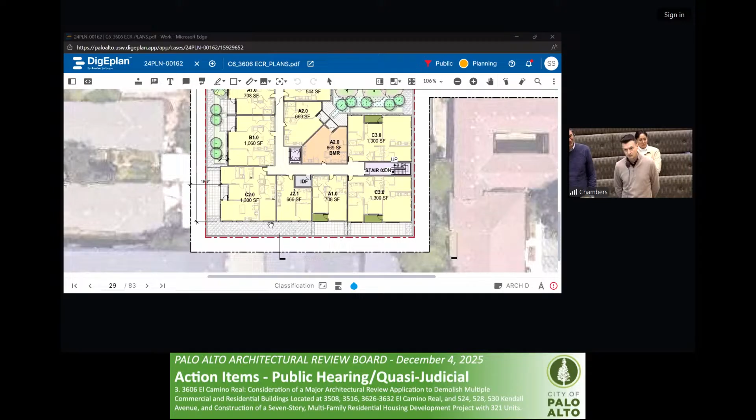Can you share that, the area with the pebble hatch? What is that? I'm kind of looking at, what reference are you looking at? Right where the cursor is, there. Okay, I didn't know who was looking at what. That pebble hatch there, is that outdoor space or is that roof? It's not an occupiable space over the garage there.

So it's just roof over the garage immediately? It will just be some kind of crushed rock or decorative stone there to cover up the waterproofing at that level. And then on either side of it, that would be the patio extension. You can see on the A1.0 and the C3.0, those would be extended patios for those particular residents.

So the C2.0 gets a larger balcony with the grid hatch or no? Correct, yes, it would have a larger one. You can kind of see it if you go up. It's better shown on the B1 there, in the A1.

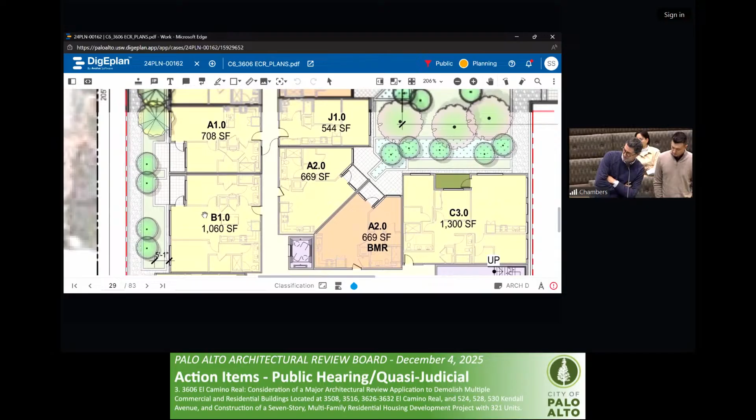So there's a bit of a patio extension there, and then there's a raised planter with shrub planting to provide some vegetation and some screening for those residents. That's not for residents to step out to? No, just the area immediately adjacent to the unit.

Okay, so all those trees are over the roof? Correct, they're on top of the garage.

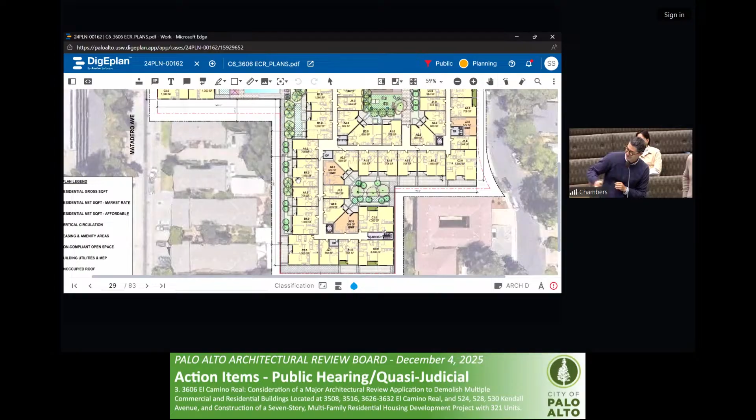So just the maintenance folks would go out there somehow? And then you can see, actually, if you go to the right - or take that hand and go, no, I'm sorry, to the left. Yeah, I'm sorry, he's laughing at me. There's a service path along the parapet that's 4 feet wide. That's how the planting would be serviced. So right there, correct, so they wouldn't have to go through individual units to service the planting along that edge.

So is that true of the courtyard on the bottom right in plan if you scroll? Correct, it would be similar. There's no planting shown there, but we could study adding it in a similar manner. It would be the same condition where you'd have a service path along that parapet to take care of the vegetation there.

I was actually asking about if you slide up a little bit, there's the other little inset courtyard there. Is that for residents to go out to or only for maintenance? It's only for maintenance, just a vegetated area that they can look at. It also provides a visual break for the building elevation, and their only access areas are their individual patios.

So for staff, this area is not part of the open space calculation then? Correct. Private or shared? The open space calculation was garnered from those patios or balconies, if you will, provided for most of the units, as well as the other courtyard that's in the breezeway.

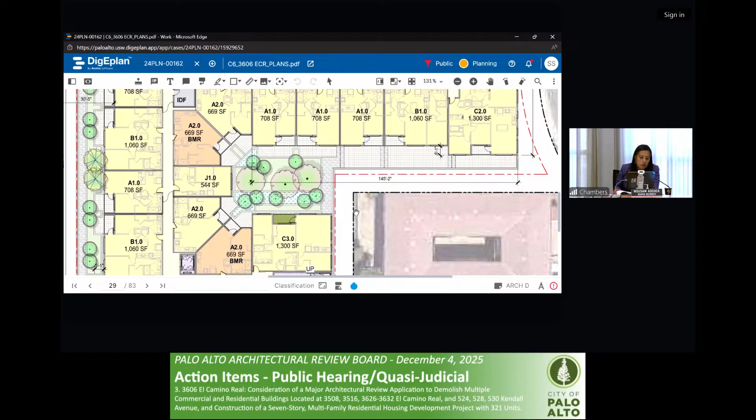Okay, I guess for the applicant, is there a reason why you don't want that to be a space that people could use? There's such a dearth of outdoor space in the project, and you have landscaped areas that, I mean, if you wanted to, you'd just jump your little railing and go there, or at least from the third floor, but why not make it nice for people to go out?

There's a few reasons for that. It is a smaller courtyard, and it's also further away from a lot of our amenities. In these buildings, we try to cluster up the most active spaces and amenities near the building's entry. That pulls a lot of the active space away from the neighbors. So in our mind, different spaces can have different programs - this smaller courtyard is meant to be more passive in nature.

It's really just to give some greenery for people and create a mass break in the building. The other two courtyards are programmed to be more functional and active. You just have such a small amount of outdoor space for people living here that it seems like a lost opportunity, in my opinion. Perfect place for a little birthday party with this many people in an apartment building.

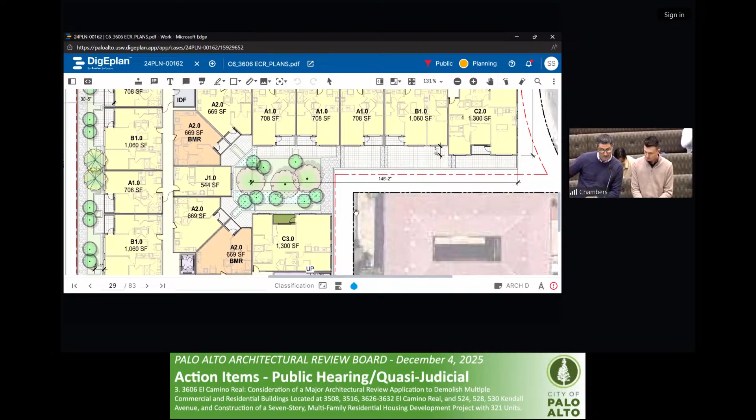The other thing I would offer is that those planting areas are raised up too, so they're 26 inches minimum taller above the finished grade. So it's not necessarily an area you could walk up into. We need to get the soil depth up there to actually get the planting.

So how is that different from the other courtyards? It's not any different, I'm just saying that's how it is. We're just, as Nathan said, choosing to keep that as a vegetated space only, and then focus the programmed areas on the larger courtyards themselves.

One other thing that wasn't mentioned is the raised planters would be for stormwater treatment. There are so many different programs we have to fit into these spaces. By putting more stormwater on that courtyard, we're able to open up the other courtyards and make them a bit more functional. So it's just kind of moving the kit of parts around.

No further questions right now. Thank you. Any other questions? Sure. No, I have one.

The whole scheme is built on the courtyards on the third floor, which in itself, the activity space there should be quite successful. How does a person who's coming in here to meet somebody at the pool get to the pool?

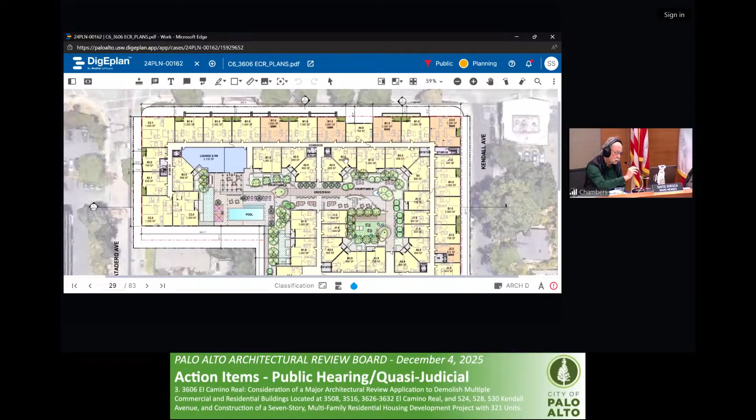By the elevators on the side. But the whole building, to make this point clear, seems to be a very centrally accessible building, but there's no door in the middle on the front of the building. Why didn't you consider having an entry? You have other projects that have entries in the middle. What was wrong with creating a recessed entry?

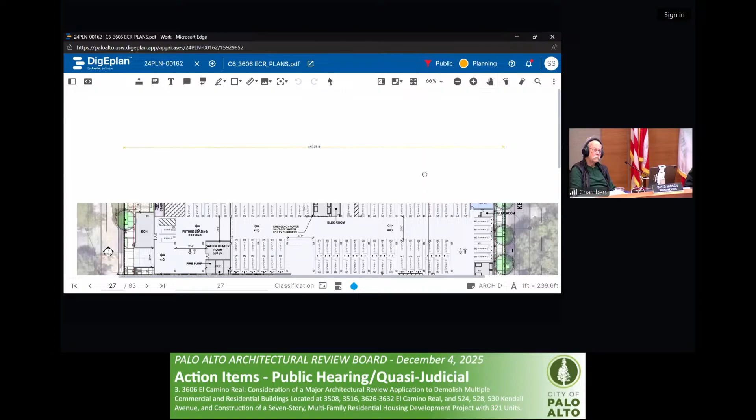Are you talking about the building's front door being on Matadero? No, being on El Camino. So El Camino is a traffic-driven area. We opted to move pedestrians away from the heavy traffic to the less trafficked area. It's just pedestrian safety. You have a significant sidewalk on El Camino, don't you? We do. So what would be the problem of walking along there, meeting somebody in the center of the building?

You could. The way this building is set up, we have elevators, so the vertical circulation is meant to drop you down near those lobbies at the corners of the building. Corners of the building tend to be a little more active, so that's generally why we do it that way. Centers of the building get you equal distance to the farthest apartments. In fact, with a pass-through that was discussed before, there's a center corridor down the middle of the building. Yeah, seems to me that would be a reasonable place for it.

It's a kit of parts we always have to work through on a program, and on this particular building, on the first floor we do have our main lobby, and the garage access wouldn't be realistic on El Camino Real given the bus line and bike lane. So our garage access, which is our resident entry, is also the drop-off, and it's also our front door, being on Matadero. If we were to put the entry to the building on El Camino dead center, that would be over 200 feet away from our garage entry, which is how most people will be visiting the site. So the idea is we put our entry to the building, the driving, bus stop, and the lobby all at the corner, all centralized.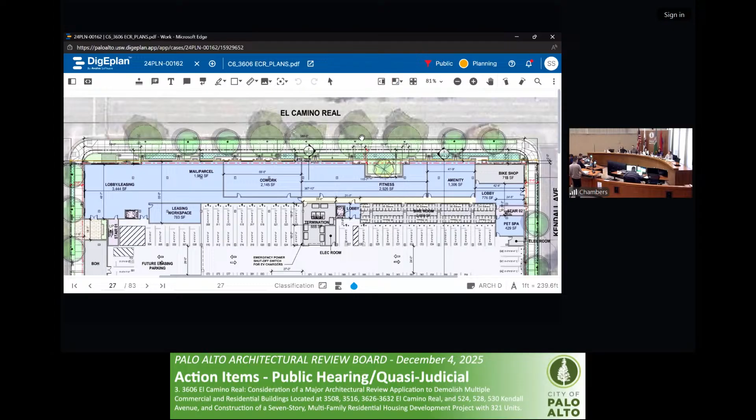Quick question—this property would feed into Barron Park Elementary, Juana Briones Elementary, or both? I don't know. Okay.

And you mentioned about the trash collection. Do you know how often the trash will be collected? Each week, like twice a week or 3 times a week, something like that? Do you have any calculation? 2 to 3 times a week.

And you also have a trash room at the center of the building. So how will you handle the trash in that room? Will you pull it to the one close to the street? Good question. A building of this scale, we generally put in 2 trash chutes into the system. One, it's a shorter distance for residents to walk. Two, Amazon boxes these days have clogged chutes consistently, so not only have we upsized the chutes, but we always provide 2 trash rooms now. That way, if one goes down, one still works. The building maintenance and managers will be staging all the trash into the central trash room on the day of pickup, so it would be a function of the building.

Okay, and for the parking for the tenants, are they all designated parking spaces to the units? So each unit is closer to where they live, like down to the close elevators? That's part of leasing, I think the parking is unbundled. Yeah, but it will be assigned, and we do assigned parking in these projects just for that reason, to get people close to their elevators.

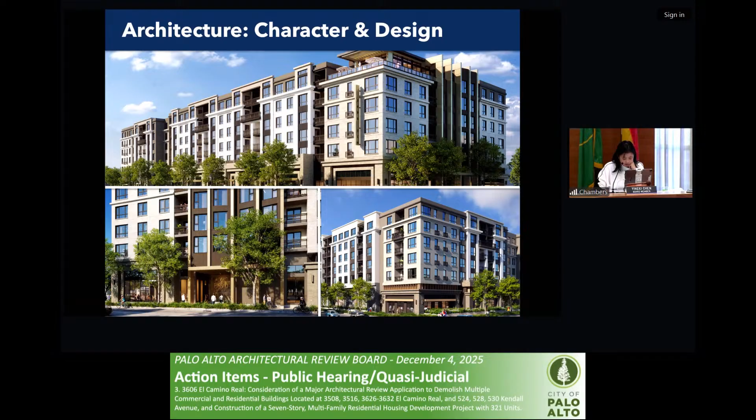Okay, so if we go to the front facade along El Camino Real, are the window heights different? Like it goes from taller on the leasing office side and then goes down to fitness, and then even lower on the pet spa?

So our building, let me find a good image here. I'm looking at sheet AP 3.00, the front elevation. Yeah, we have a mixed layout, here we go, perfect. So this is our second floor. You can see some blue frontage along here, stretching from Matadero all the way to the mass break in the building. That's double height space where we're using that to conceal the garage and create taller amenities. So half the frontage has double height windows, and the other half towards Kendall would be single height windows.

One thing to add is that one of the requirements of the focus area was a 14-foot height on the ground floor, which we recognize as part of the contextual character the city's trying to achieve. By having those double height features, we're able to further activate the pedestrian experience along El Camino and shield that parking, which is another goal of the focus area objective design standards.

Okay, thank you. Can I ask two very quick graphic questions? On the plans, particularly on the third floor, some of the balconies have a green coloring and some don't. Is that a material change?

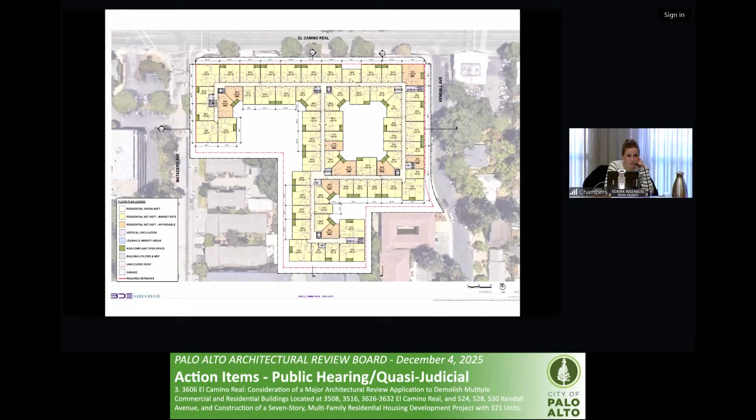Yeah, they would be borrowed light bedrooms, so it's not a solid wall—it would actually be glazed glass, frosted. Both would be those, for privacy and light and air. But what about the air? Those units typically have barn doors or large sliding doors on the side, so you have glass facing the living room and a door on the side that opens it up all the way. And it all complies with egress? Absolutely.

The vertical fins on the Matadero side, I noticed those are there to emphasize—so in that really fancy rendering at the very end of the presentation, the thank you slide, you've got the vertical fins at that angle, and as people are driving southbound on El Camino, that's the view they're going to see. This is sort of the showpiece view, so I appreciate that this is the rendering we see over and over, because that's really the most prominent facade people will see while driving—and we are a vehicular city, as much as we don't want to be.

But you use these fins over here, and I'm assuming that's to emphasize the lobby area? Yeah, yes, it's meant to do wayfinding, mentioning the whole building entry at the center of the building. Because our frontage on ECR is so long, we really thought it was wise to put the entry on the side of the building, where it's a lot smaller, and centered on that frontage.

So you're somewhat reading my mind, but before we get to that conversation, why did you not choose to put any entry on Kendall? Kendall is just a secondary frontage to the building. This is really our main corner—this is where the building managers will be, where the mail will go, all your pickups. We really try to keep it clean so you know where the front of the building is.

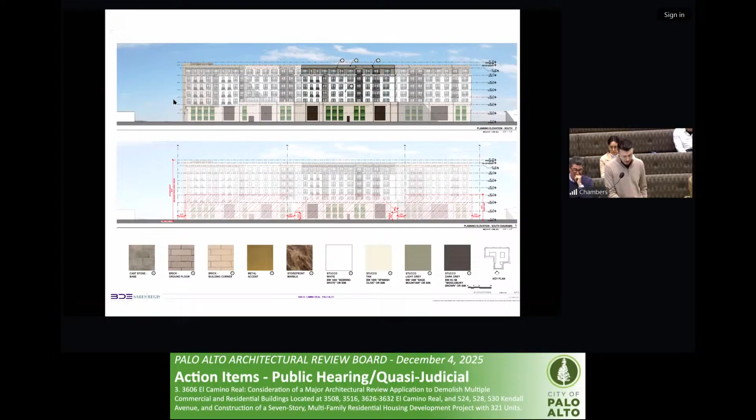We did not consider putting the fins anywhere else, mainly because Kendall doesn't have a pedestrian entrance. On Kendall we could do that, especially since—let me get to the plans—we do have a lobby there. So that could be a possibility, to move that metalwork around the building. Sorry, I'm going to draw on the screen if you stay on that for just a second. Yeah, having some fins at that lobby area would make sense.

You also have this dip in there, which in my mind is somewhat de-emphasized, right? You've got this one tree that's pulled back, and that could be a really interesting moment—an opportunity to break up the facade. And additionally, if you flip the other screen, I think it's one more up.

Sorry, it's the one that shows the second level where we can see the double height in the blue. I guess it's one down. Yeah, there we go. So this area here, when you're looking at this facade along here, you've got that beautiful

double height glazing. I think it's really interesting how you guys have hidden the parking garage behind it. I think that's actually quite successful. But you have this sort of natural break here that would break this building up visually into the left side and this right side here.

And I'm wondering why put all this attention into this bump in and then not do anything with it visually on the facade on El Camino? Was there a different design before? Was this indent in reaction to that one tree area? Talk me through that a little bit.

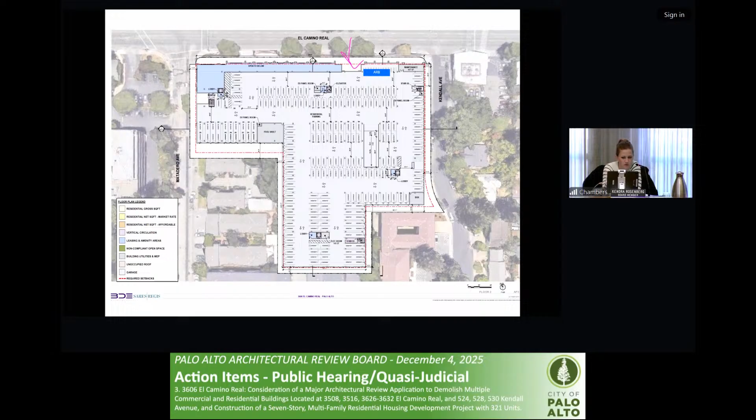It is not an existing tree. Sorry, I get turned around on the set a little bit here. No worries, pushing buttons.

There's no existing tree there. We didn't have a mass break originally. We acknowledge that the project needs a mass break. And the mass break where we have it is just off center from the street across, I forget the name of the street, but it's just off center from the street across from us. And what that does is it lets our building have its corner emphasized visually on that street alignment. So we put the mass break there intentionally.

Does that answer the question? More or less. Thank you.

Two smaller questions. Bus stop integration, again, if you stay here, it looks like it's just sort of disconnected, but right there, easy access. Is there anything you're going to do to emphasize or reinforce the bus stop that's existing?

The building does step back at the corner here. So at the base of the building, we do have the 6-foot step back, but at the corner, we do step it back just to create more of a pedestrian realm at the corner.

Great, okay. Final question. I noticed on the landscape design, so I might be looking at the landscape architect, that there was a pet area emphasized in the images. And then on the floor plan with floor level 3, I didn't see anything labeled pet area, so.

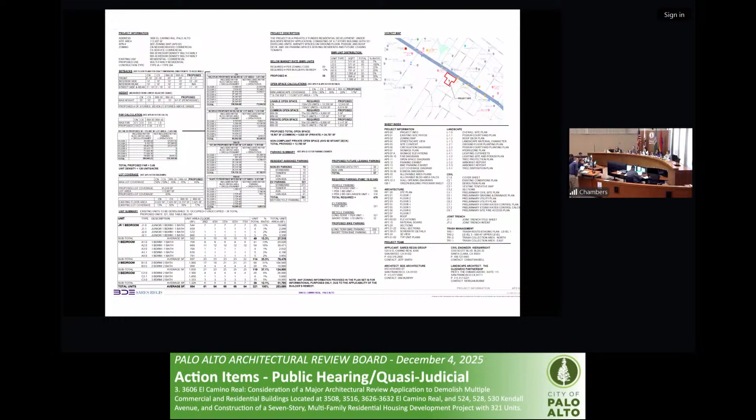All right, so me with my 100-pound dog would have to take the elevator down to the first floor to let him relieve himself on this little patch right here. Is it gated in? Is it fenced in? It is fenced. Fenced in, okay.

But likely for smaller dogs, I would assume, since it's a relatively small area? The challenge there is that there are transformers back there that PG&E needs vehicular access for, so I'm giving as much of a footprint as I can. I hear what you're saying. And having it up on the 3rd level is a sound issue. It just becomes really loud activity, and then it's a maintenance issue as well, smells and whatnot.

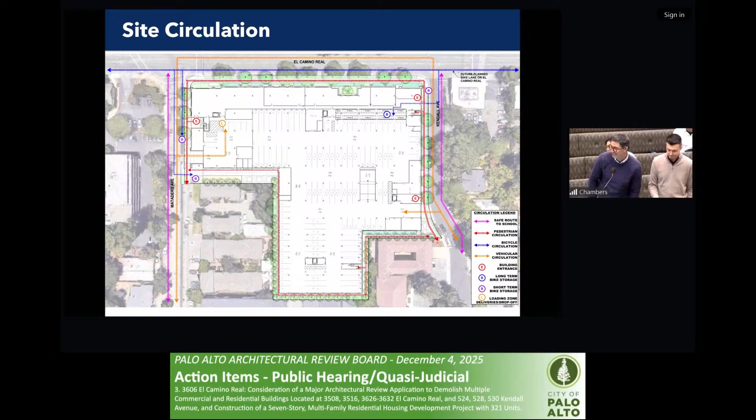Yeah. Do you mind going up to the 3rd floor really quickly? If I do it too fast, I won't find it. There we go, right there.

Do you foresee people coming down and thinking, oh, my dog's fine right here? It becomes an operational challenge, like we've done it on other projects as well.

Right, I mean, I guess, how do you enforce that? Some little lady on the 7th floor would have to look. Property management would enforce it. Okay, so they would be required to go all the way down to that 1st floor and run them in that small yard there? Okay. Even the pet owners are not even allowed there, right? Oh, right. Nobody can get there.

Okay. But your 100-pound dog could jump the fence for sure.

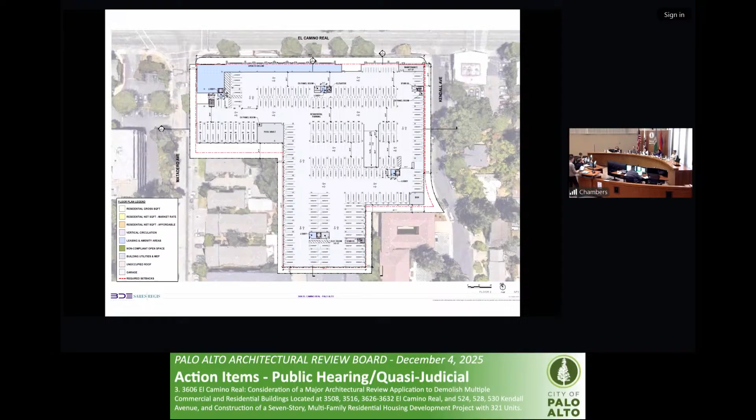Thank you. I do have a follow-up on the facade break. If you go down to the first floor level, where you're showing the fins, is that actually here? Correct, so it's not really at the lobby per se, because the lobby has this corner presence, and the fins are almost like a backdrop to the lobby. The entrance is sort of on the fins, but the lobby orients you differently, so you're entering off Matadero. It seems like the fins are nice, but it doesn't say 'enter here, this is the lobby.' It doesn't seem exclusive to the lobby, like you couldn't use the fins elsewhere. Is that correct? Do you see it that way?

I think what I'm hearing is you all like the fins and would like to see that moved around the building a little bit. It seems like it's adding interest on that side elevation, and it could really help the front elevation if you had a moment of that, like an obvious place between your change in facade elevation, so you could get a 1/3, 2/3 split on that long elevation instead of one. In plan, that tree seems to do something, but when I look at the elevation, I can't even find where that is, so it's not doing enough in my opinion. Just curious if you would consider that.

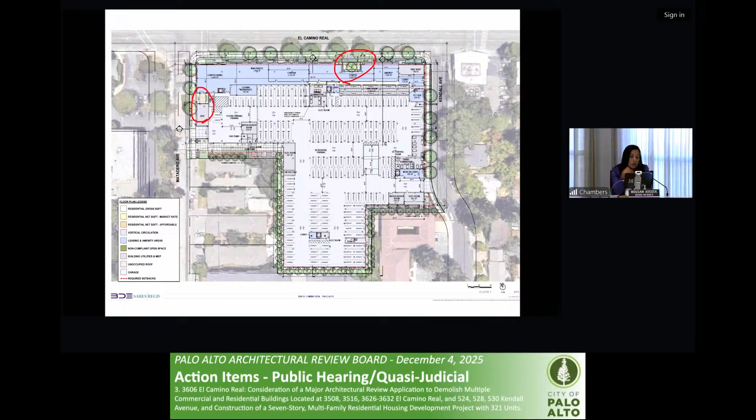One other feature we're trying to anticipate is that there's a public art requirement for this project, and the indent is one consideration of a potential place for that feature down the road. We haven't gotten far enough with that consideration, but it's something we're keeping our eye on, because we agree it's an obvious place to put something, and maybe that's the solution.

We're having an awful lot of discussion that's back and forth here. Right, so if we don't have any additional questions, we can just move on to our comments and internal discussions. Yes, I think it's a good idea.